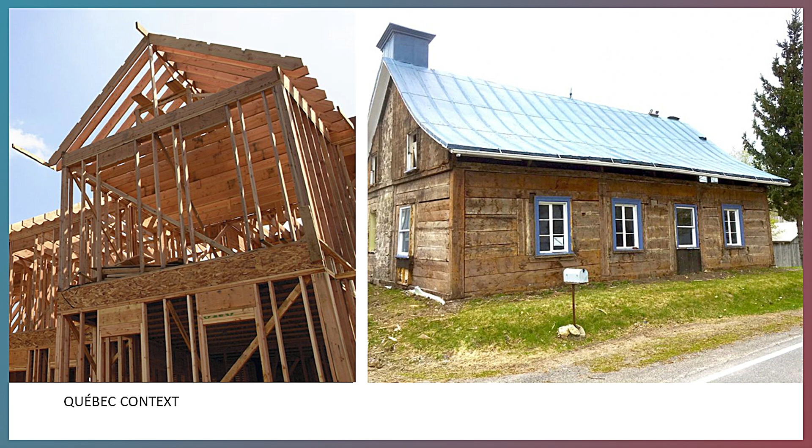So I'm not going to talk a lot about the Quebec context. I think everybody here knows the province, and this presentation was presented at Woodrise, so it was more in the international context. We also saw very good examples of wood projects from the history of Canada, like 100 years ago. And you know as well as me that the new technologies arrived around 2010, as David was talking about earlier.

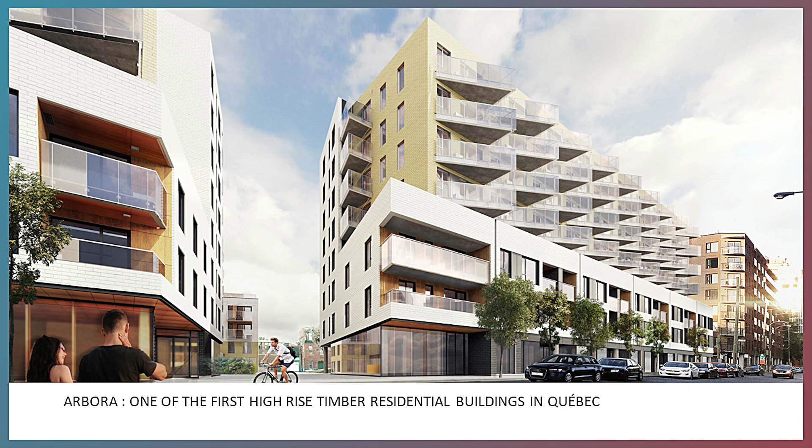So to put you in context, Arbora is one of the first high-rise timber residential buildings in Quebec, and I think it was one of the biggest in the world for a while. I don't know if it still is, but at the time of its completion, it was the biggest in the world in terms of floor surface area.

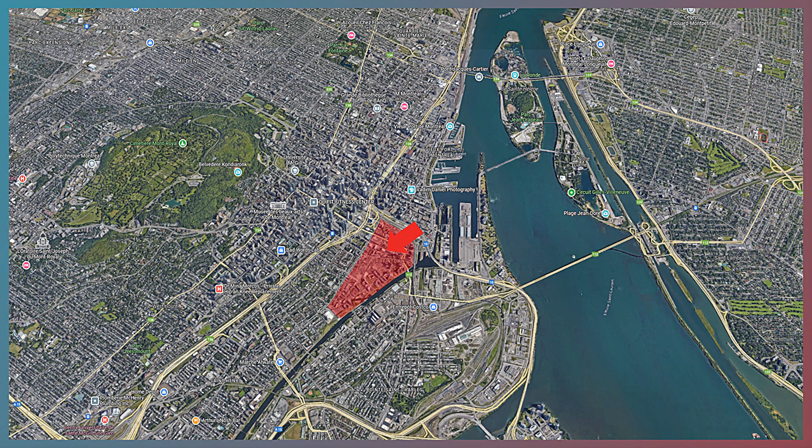For those who don't know the city of Montreal, the project is in a neighborhood called Griffintown, which is a former industrial neighborhood. As you can see, it's near the port and the CN railway. It was a big neighborhood that was a little bit abandoned for a few years, and then it's been booming since the year 2000 into a lot of residential condo construction. And you can see Arbora is quite in the middle of it.

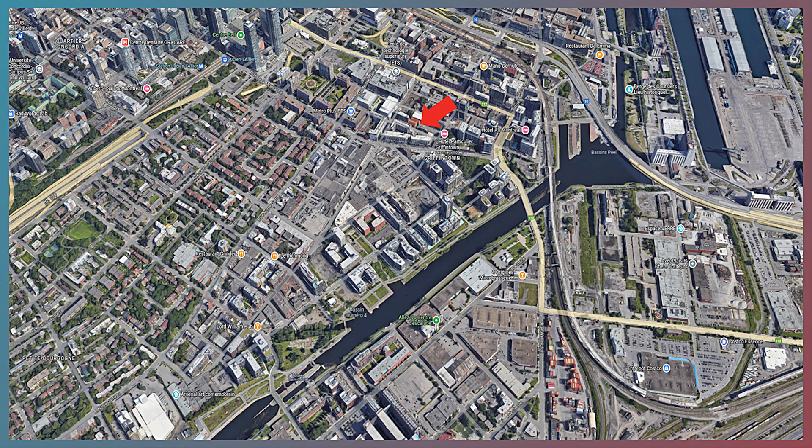The reason why it was made in CLT is mostly because our client, Sotramont, was really aware of the mass timber structure that was coming up, and he was really caring about sustainable development. So he was really pushing to do it in mass timber. It was really his choice that we did the structure, and also because he wanted to stand out from the other projects being built all around Arbora, because there's a lot of new buildings in this area. They are all condos, so he needed to stand out.

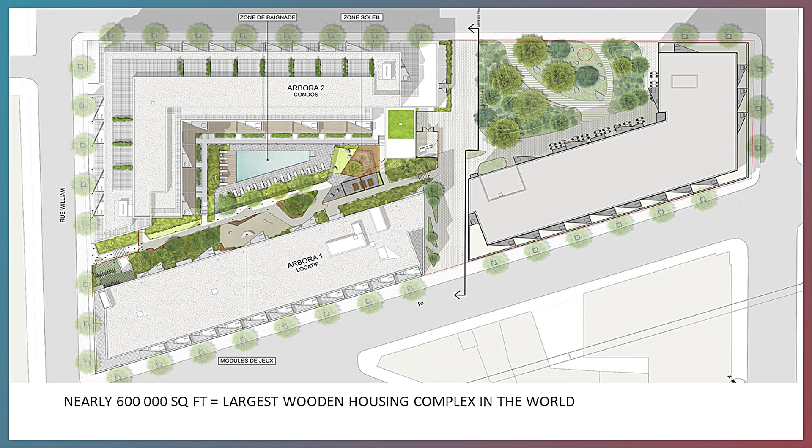So the project is composed of 3 buildings, and each building has 8 stories. There's a total of 434 residential units, and the total surface area is near 600,000 square feet, which is pretty large.

Beside the underground parking and the first floor that is a commercial surface, everything, even the elevator shaft, the staircases, the shear walls, everything is in CLT. And you have to remember it was started in 2013, so it was quite new at the time.

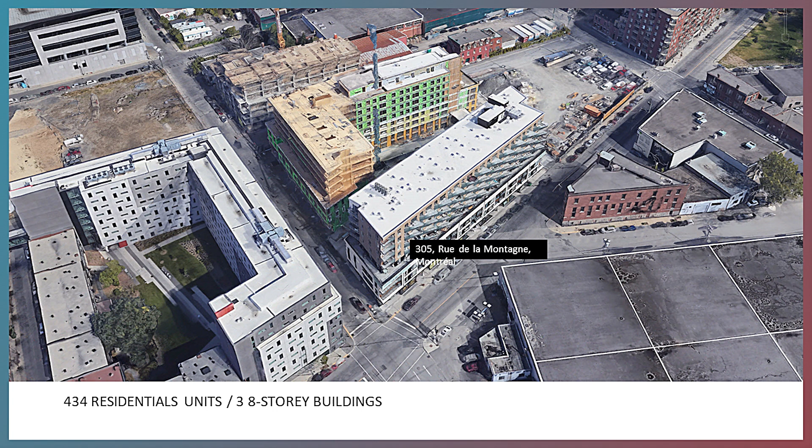So in order to achieve such a project, we had to — I wasn't there, but there were a lot of discussions with the RBQ. RBQ is the government body that governs the national code in Quebec, and they established a few criteria to respect the code, mainly for fire. That was a little complicated.

It led to the guide for mass timber buildings up to 12 stories that you see. I think it was the first step before it was introduced in the national code.

So the main criteria we had to respect to be conform was the building area could not exceed 1,500 square meters. There were sprinklers added in some areas that usually are not required, but it was a demand from the RBQ to add some, like in the staircases.

There are sprinklers at every stair landing. And also the most difficult criterion was the maximum surface area that could not exceed 10% of apparent wood.

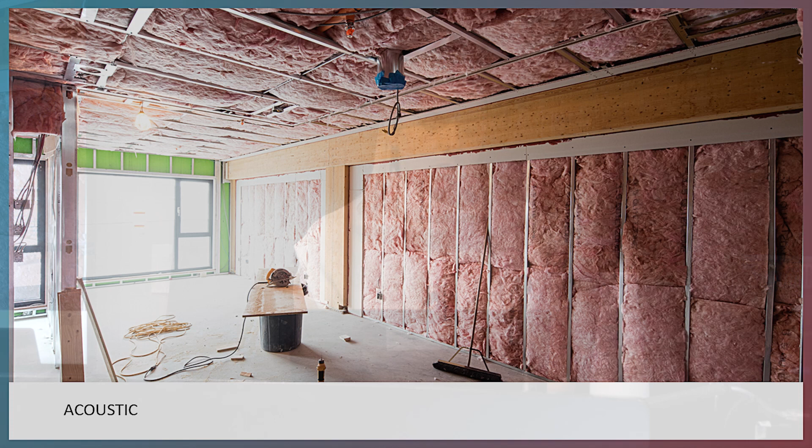So you will see that most of the wood in the building is covered with gypsum.

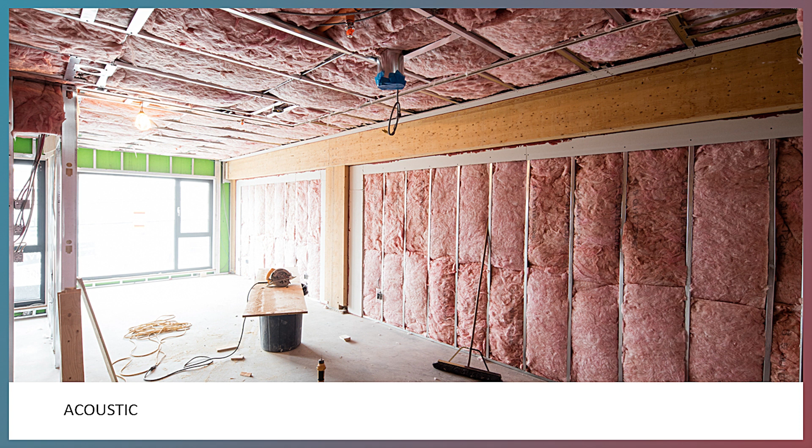Also, the fire thing was one requirement, but there was also some acoustic requirements. As you know, in residential it's really high — the minimum in the code is 45 STC, but we had to respect 57, because the client wanted really high-end condos, so it was a big constraint.

So all the interlocking walls were all covered on one side — I mean the columns and the beams were covered on one side.

We decided to cover with the acoustic feature on the side of the bedrooms, and you'll see — all the columns are covered on one side, and they are exposed on the other side where the living room is for the other unit.

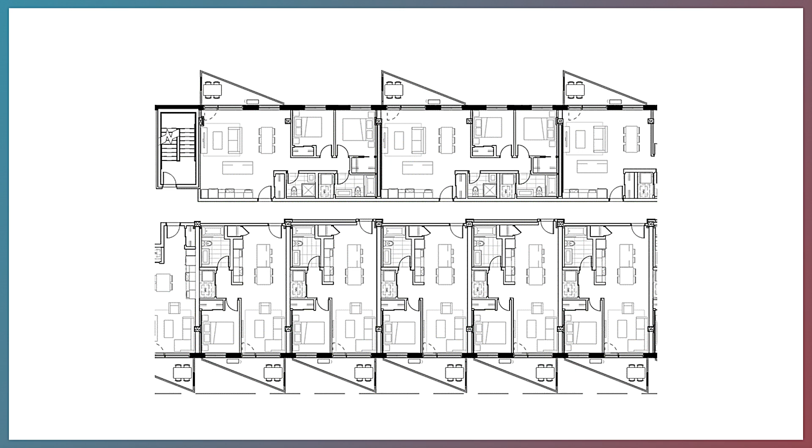So you can see here some typical plans, and you see that all the gypsum is on one side and the other side is left exposed.

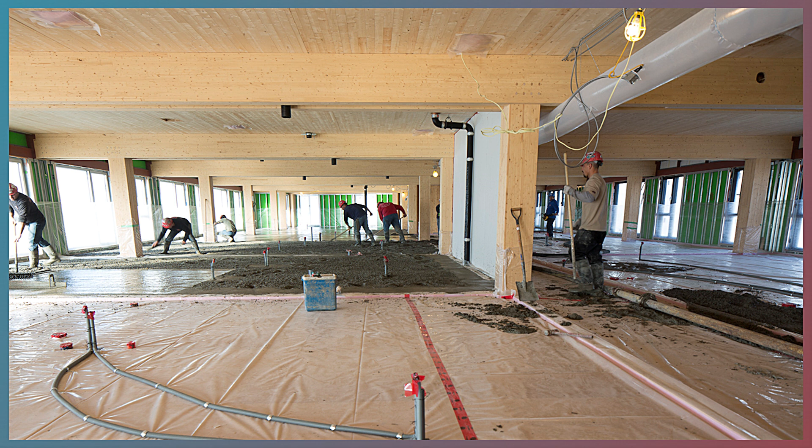Also, for the acoustic requirements, we had to cover the floor with concrete. So it was another thing where we had to hide the wood on the floors, and we also had to add the acoustic membranes. So you see now the concrete is poured.

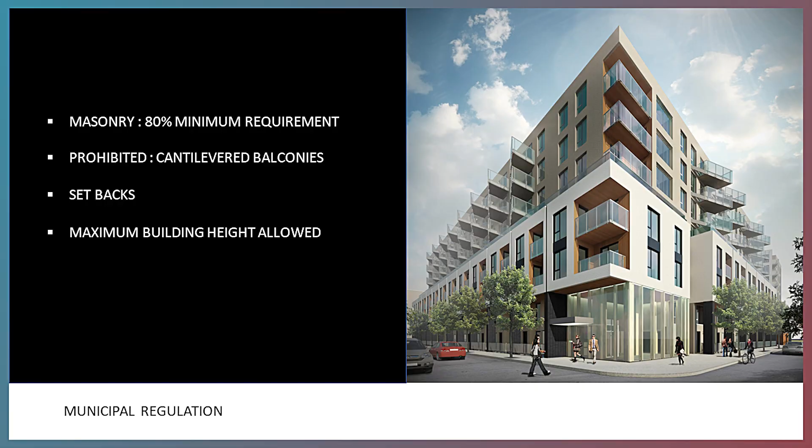Another thing — that was for the provincial regulation, but there were also some city regulations to meet. One of the biggest was masonry. In Montreal, we have to have a minimum of 80% masonry on the facades in this neighborhood in particular.

We could not have cantilevered balconies. We had to have setbacks at a certain height — I think it was 12 meters high — which you know is not easy to make with CLT. We also had a maximum height allowed for the building, which was about 25 meters.

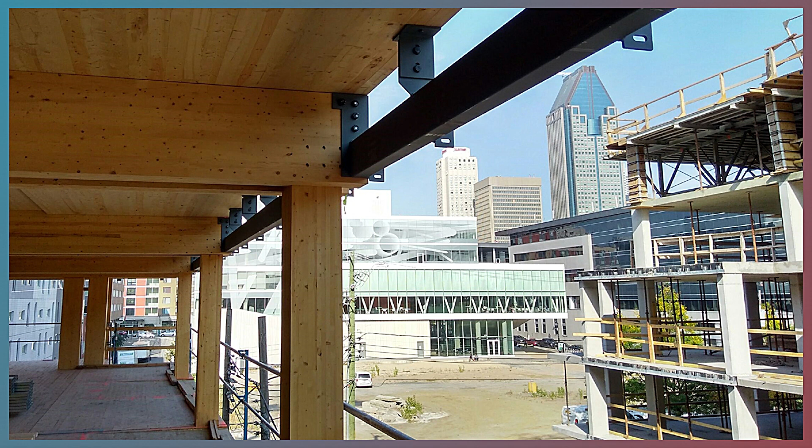So in order to hang the masonry, we had to have some lintels, and because we could not fix the lintels at the slab edge, we had to suspend them under each slab. That added a lot of complexity in the project, and also a lot of cost.

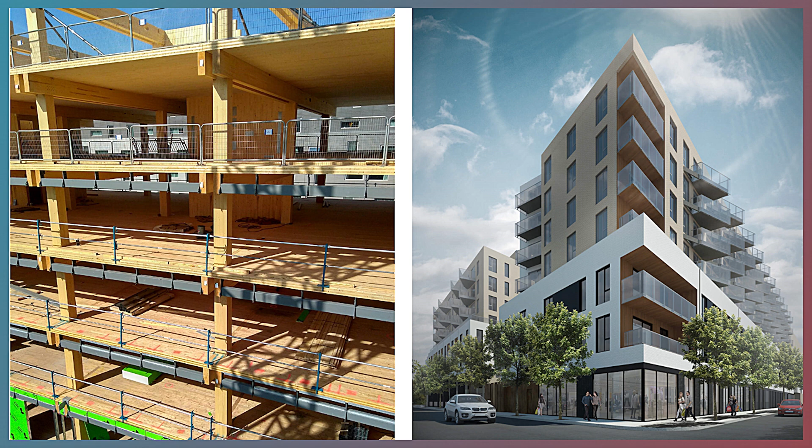You can see every slab has a lintel.

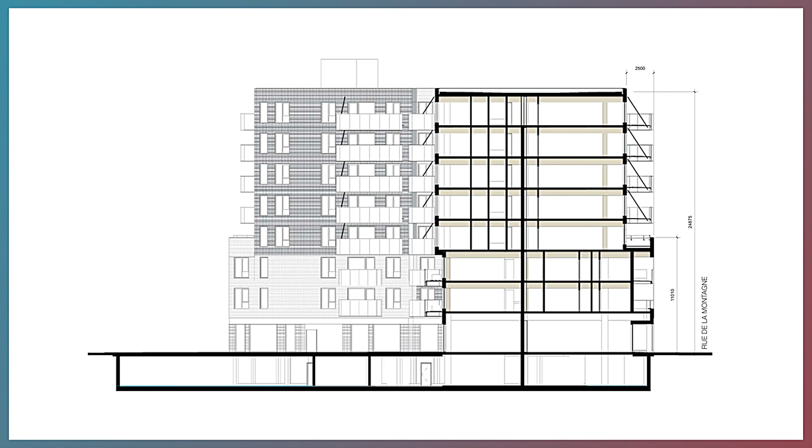As for the maximum height of the building, we had 25 meters, so we were able to have 8 stories. We did some comparison just to see what it would be if it was in concrete.

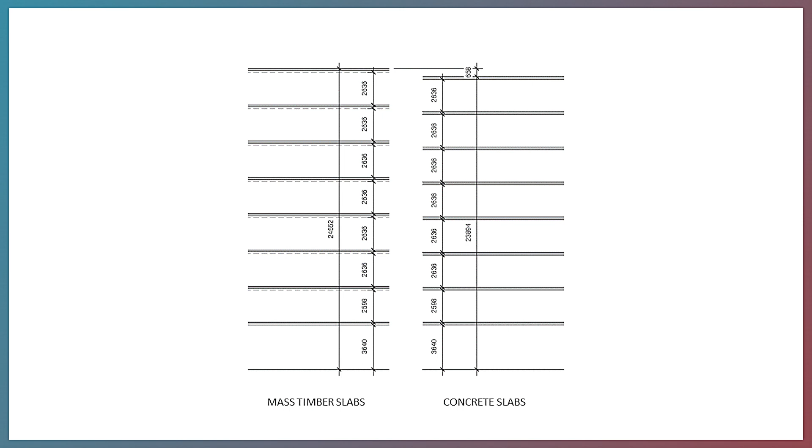In concrete buildings, all the ventilation goes through the slabs, so you don't lose a lot of ceiling height, which is not the case in mass timber. So we wanted to check if we were losing a floor by using mass timber. Sometimes that could make a difference, but in our case, it was not — we were okay with 25 meters to have the 8 stories.

Because you cannot have the mechanical going through the slabs, we had to work in coordination to do the holes before, during fabrication. We had to think about where all the holes would be, to reach a maximum height.

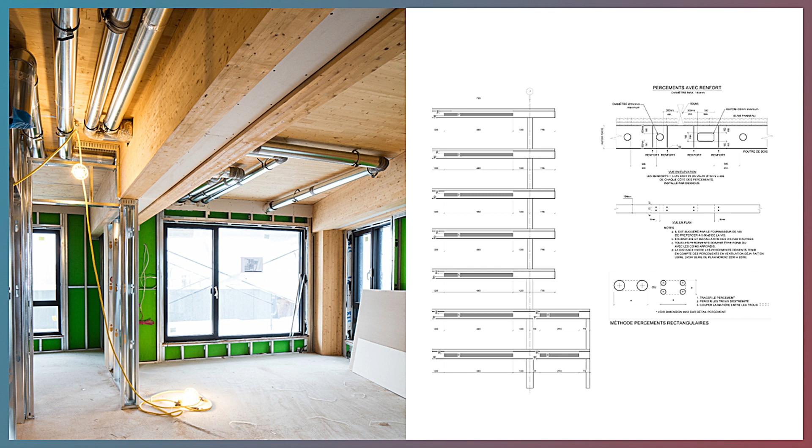So they were pre-drilled by Nordic. That was quite a lot of work because we had to work with some gabarits — I don't know the word in English — which Nordic supplied to us, as you see on the right. We had to respect that in order not to have a problem with the structure.

It was because of that it was decided pretty early in the project that we would use 3D modeling, in this case Revit, to help coordination of all the elements in the building.

Everybody in the project had to work with Revit, even Nordic, who wasn't really familiar with the program. We asked all the stakeholders to modelize everything in 3D, even every unit, every mechanical system in every unit. That's not something usually done.

Usually the mechanical engineer will modelize one typical unit or a few typical units, but not all of them. So that was quite a lot of work, and we had to check if everything was coordinated with the pre-drilling in the structure.

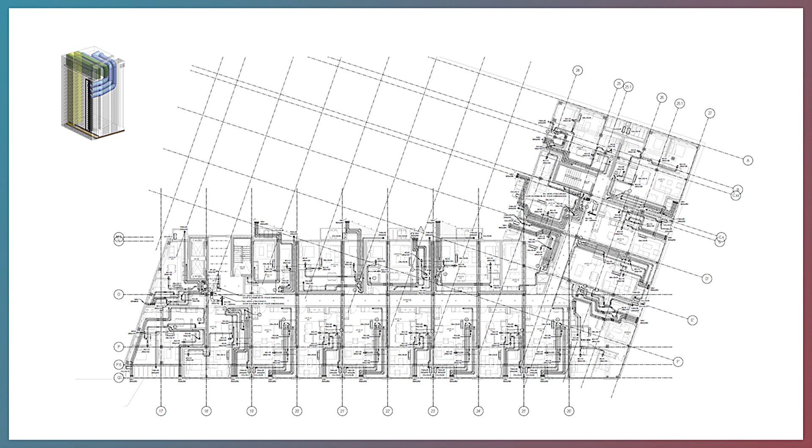You can see that in residential, the ventilation is individual, so it multiplies the ducts, and it became a big spaghetti.

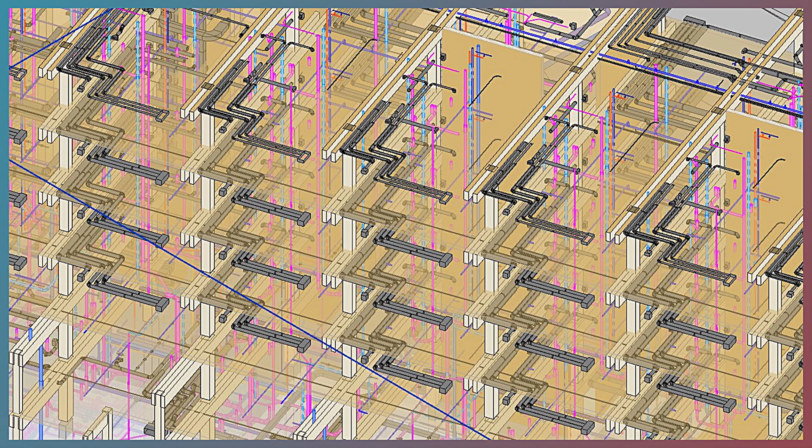To be sure there wouldn't be any problem on site, as I said, there were a lot of problems in the first phase, a little less in the second phase, and during the third phase, Sotramont, the client, asked all the subcontractors to redo their own fabrication drawings in 3D.

This was to make sure they would follow the pre-drilling that was already planned.

Even for the contractors it was quite new, and not all the HVAC contractors at this time had the knowledge to use Revit.

So it was quite a challenge for them and for us, because we had to check if their drawings were all right.

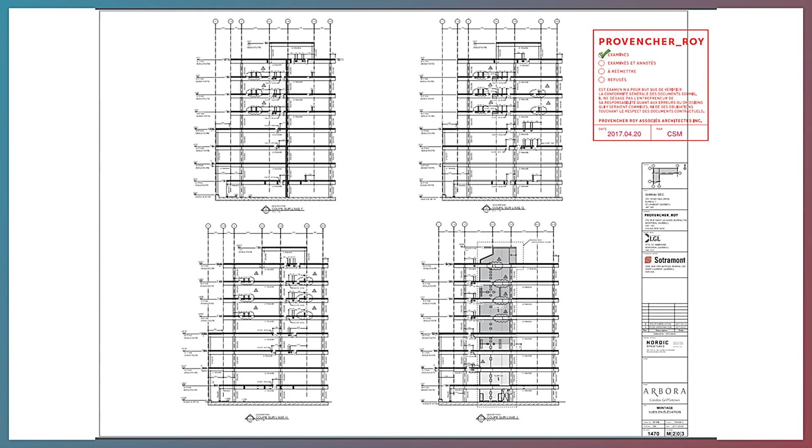Even Nordic, as I said, was not familiar, so they had to work in Revit in order for us to check their model. Then when it was fine, they had to redraw everything in another program they would use.

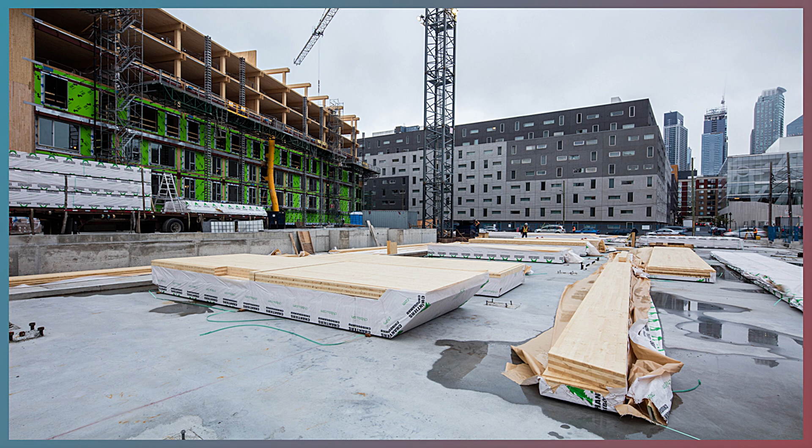To fabricate the pieces. So we were learning from one phase to the other, but I think in the end, at the third phase, finally everybody was really comfortable with the way we were working, and a little bit less worried, more comfortable overall.

We could have done a fourth one. I think it would have been perfect.

So a few pictures during the construction. I think those pictures are my favorite, because you can see all the potential of the wood.

And maybe that's one of the reasons why it's still difficult to build in wood, because in residential you can't feel it as much as in other kinds of projects where it can be exposed a lot more, like we saw yesterday.

But that was a really nice way to innovate, and I'm really glad I was part of it.

Everything is not negative - we became a lot more efficient with time. And as was said before, the project was studied a lot by different research to compare with concrete and to develop new innovations in mass timber.

By doing residential projects where we hide all the wood, it's not helping our cause, because people won't necessarily pay more if they don't see it.

Another graph is about positive and negative perception. For the positive side, this one is only for mass timber — thermal comfort. The result was 54% of people thought mass timber was more comfortable in terms of thermal aspect, against 30% for concrete.

Environmental impact is considered eco-friendly, but it's funny because at the same time, people think that logging contributes to deforestation. So it's a little bit contradictory — they think it's eco-friendly, but at the same time they're quite against it. It's really funny to hear that. But again, I think it's a question of education and the way we harvest the forest.

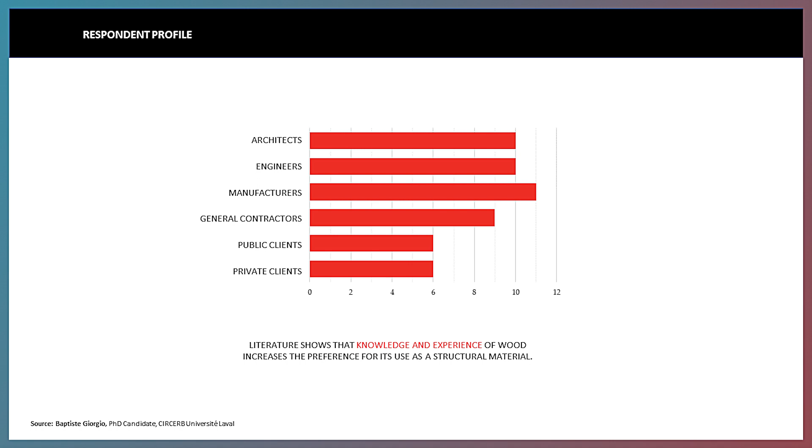It shows that knowledge and experience with wood increases the preference for its use, so again, it's a question of education. There were two aspects considered in this research.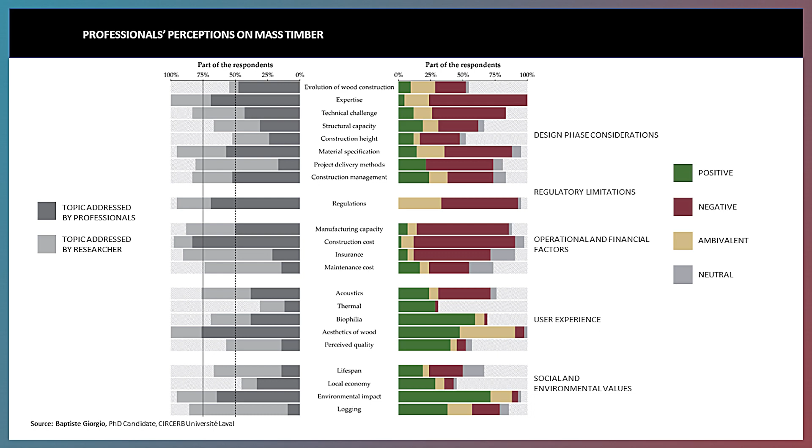You see the expertise, even though it's increasing, there's still a lack of formation, and it leads to a perception that using mass timber complexifies the development of projects and favors more established practices. That means we tend to do the same recipe because there's no risk and everybody feels more comfortable — that's a human way of living, I guess. But if we want to innovate, we have to educate people and share the knowledge more.

Material specification — to specify wood, especially in public projects, you have to specify a product that can come from at least three different suppliers. This is a problem for contractors because there aren't always enough suppliers, and even for clients, they sometimes cannot use mass timber on public projects if they can't find three different suppliers — it goes against the regulation in the province.

So the regulation still, as you know, we use the Canadian Building Code, but we have our own version that is a little bit more severe. So I think it would be a good thing if we could at least get the same permissions that the Canadian code has, because it would help this type of construction in Quebec, because it is less permissive.

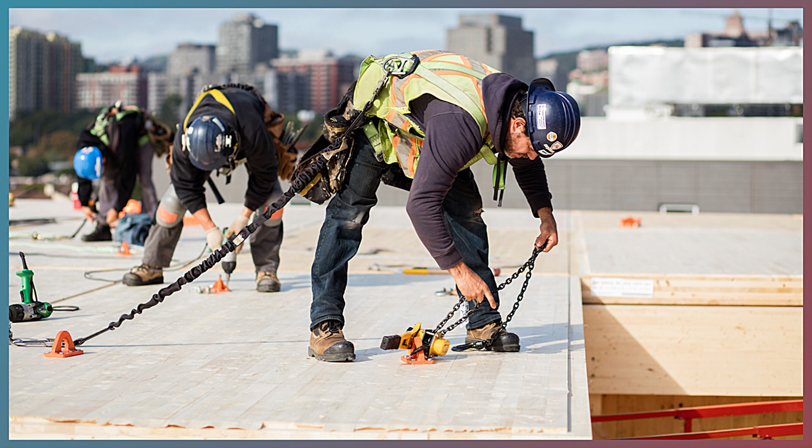So I hope that I will be able to come back maybe in a couple of years to present another project. I really like Arbora, but it's been 4 years now, and I would really like to work on another one.

But we're working on other mass timber projects, as you can see. They are under conception, and I don't really have the right to say what they are. But as you can see, they're not residential, and I became more involved in residential, so I'm waiting for another one to come up.

So thanks a lot, and sorry for my English.

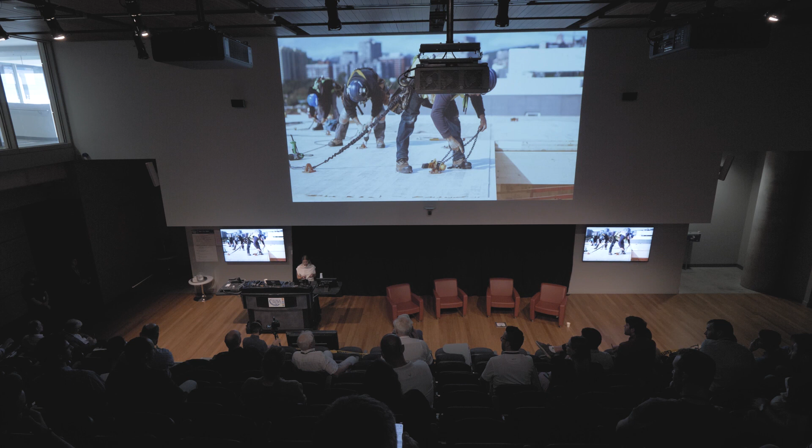Sorry. And I have a question for you. Why is wood so important for you? For me? Because I believe in sustainable development, and I think I'm also really sensible to the aesthetic of wood. So, yeah.

And I think as an architect from Quebec, we have such a big forest. We have the material, and we just have to use it.